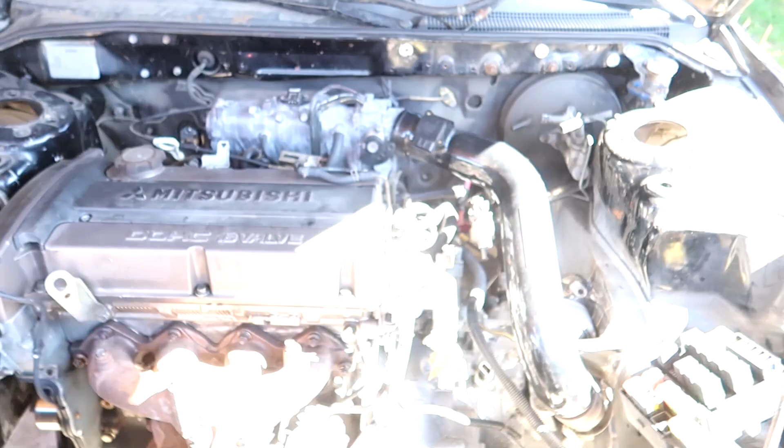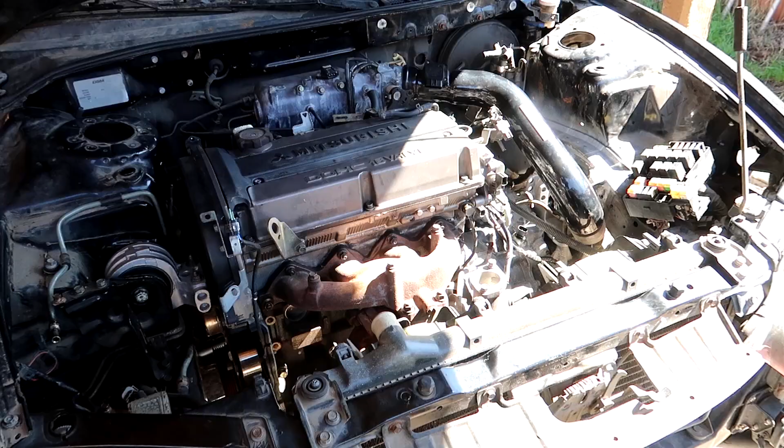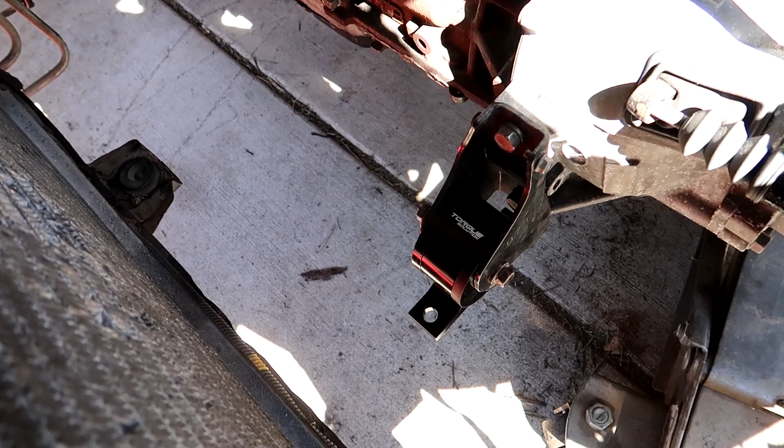Battery must be dead. Yeah, I'm just kidding, guys. I figured we'd start this episode with a little bit of a laugh. I just threw that exhaust manifold, turbo, and this radiator in there just to look at it, and this engine intake is actually out of an ex-girlfriend's Scion TC. So, just thought we'd have a little laugh before we start getting really frustrated with what we got to do next.

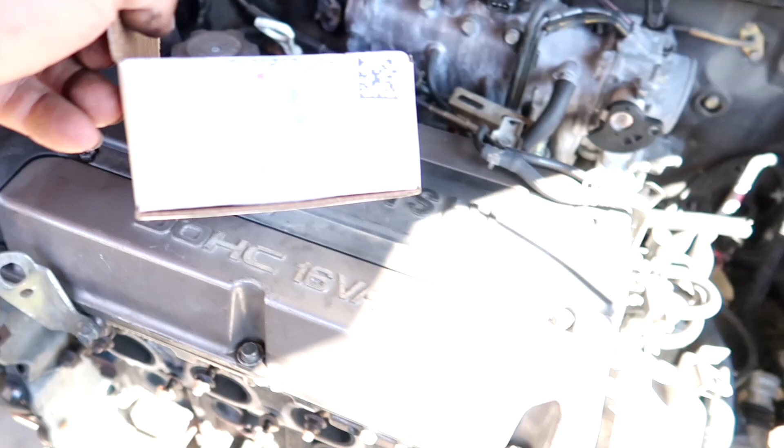So what we're actually going to be working on is this front motor mount here. I went ahead and got a nice Torque Solution front mount. This one is for an Evo 8, Evo 9, and there's the part number there. But they are actually exactly the same as the 2G DSM for the 420A and the 4G63.

I don't know about the 1G, because I don't have any here to compare them to, but I do know for a fact that the 2G 420A and 4G63 are exactly the same as the Evo, so you can get either. I went with this Evo one because for some reason it's cheaper than the DSM - this one was about $95, whereas the DSM was like $110 for some reason. I don't know why, they're exactly the same.

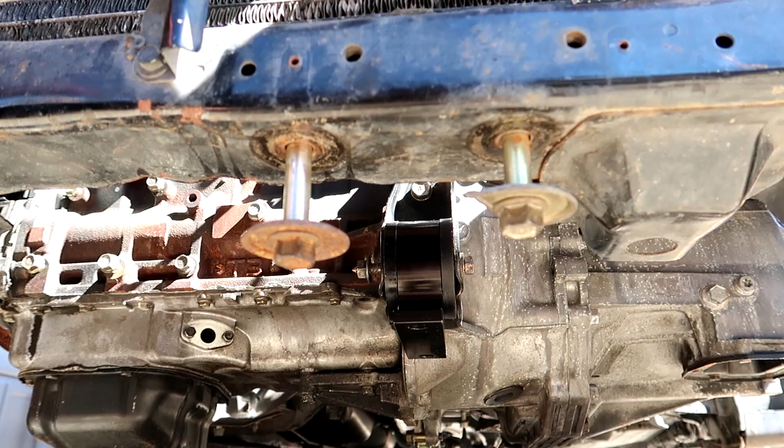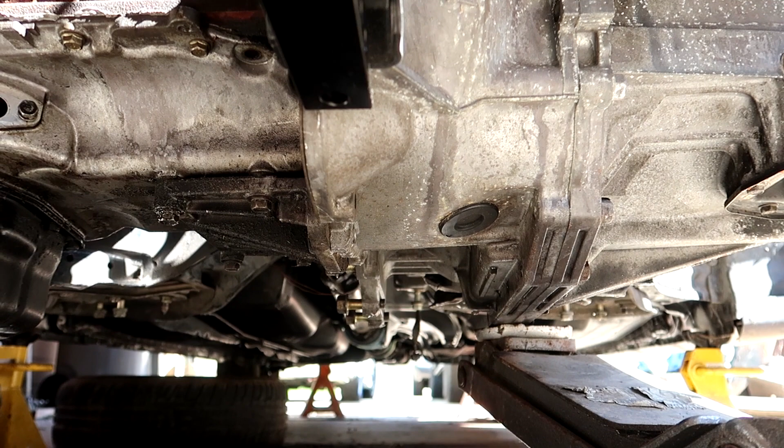Alright, so underneath here we've got these two bolts and the radiator support where the factory crossmember was bolted in, and then it's a straight shot right to this front motor mount, so that's easy. Then right through this space in the transmission you can see there's a bolt way back there right in the middle - let's see if I can zoom in on that. That bolt right there is where the factory crossmember was bolted in, so it's a straight shot all the way through this transmission.

But the part that I see as being difficult is right here, because this is going to come out here, but it's got to make a steep cut to the right and then go back. So I have to figure out what I'm going to do here.

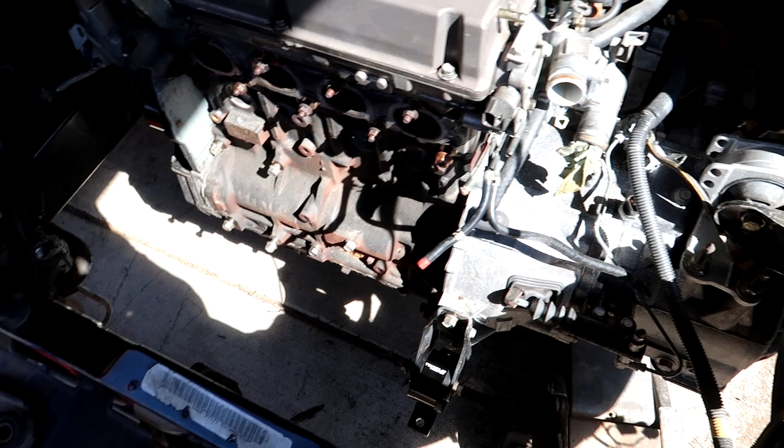Well, I've been rolling around out here taking measurements, looking at things, trying to figure things out. I pulled out the front factory crossmembers I've got here - this one is from the 420A, these are both 4G63. Looking at them, on this 420A one, from the front all the way right to behind the mount works pretty much perfect. The mount actually just needs to move forward here about a half inch, but the whole location and mount location all work out perfect.

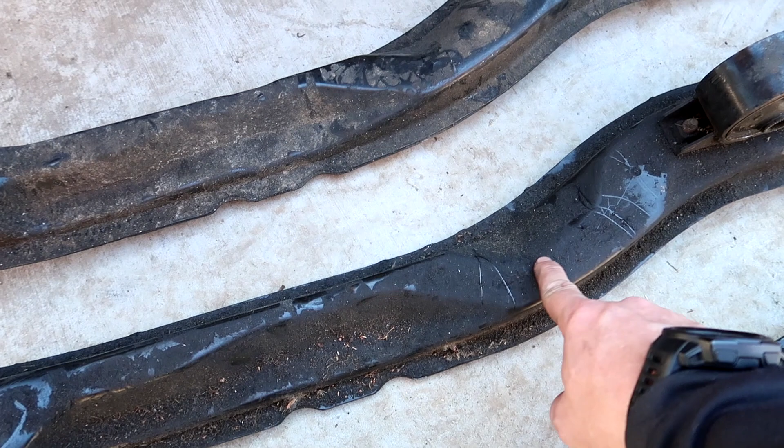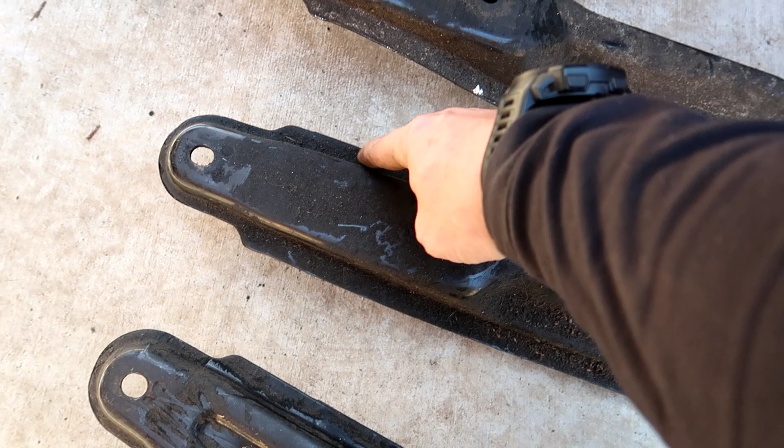But like I was saying, it needs to make that hard cut to the right here. On these 4G63 ones, from back here all the way to about here works out perfect - this all fits underneath the transmission. The only thing is it hits a little bit here and a little on the edge over here, but those could be notched out. The only issue is figuring out how to make this point and this point do almost a 90-degree angle to each other. I figure maybe I can chop that one up and use some of it to do that. I don't know, I'm still thinking.

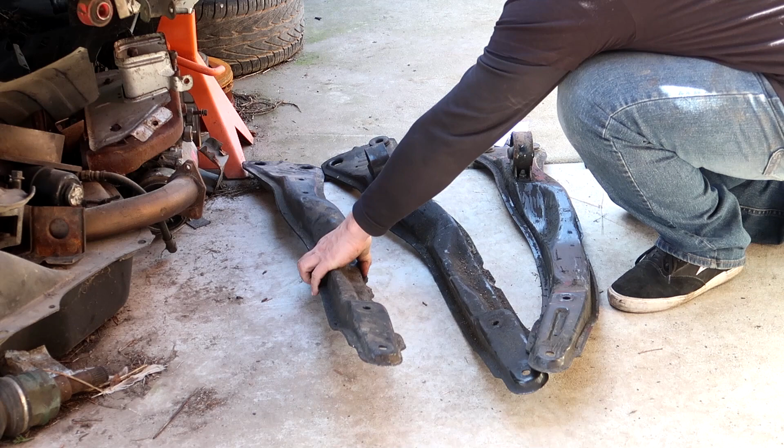Alright guys, I've been messing with these things for a while, and I just really don't think there's a way I'm going to be able to splice all three of these together to make one and make it look good. So I made the decision to run to the store. I got some 1 inch by 1 inch square tubing, some 2 inch sheets of metal, and I think we're just going to make our own. Hopefully it'll turn out good. So this is the plan I'm coming up with here.

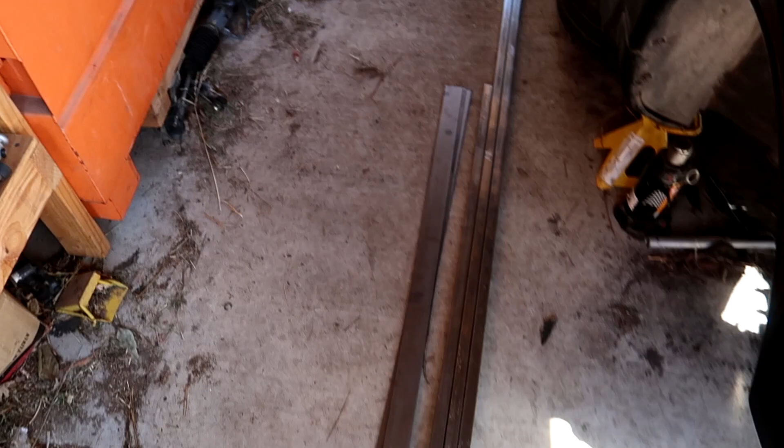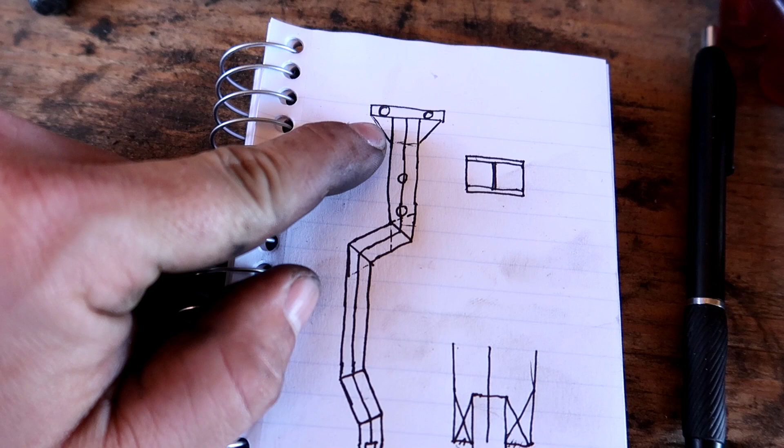Here's the front with those 2 bolt holes at the radiator support. So I figure I'll cut a piece there, drill the holes for those bolts, and then I'll have 2 pieces coming off together because that motor mount is actually about 2 inches wide. So I'll just put 2 pieces together, make it 2 inches wide, put the holes down the center, and that'll be for the motor mount.

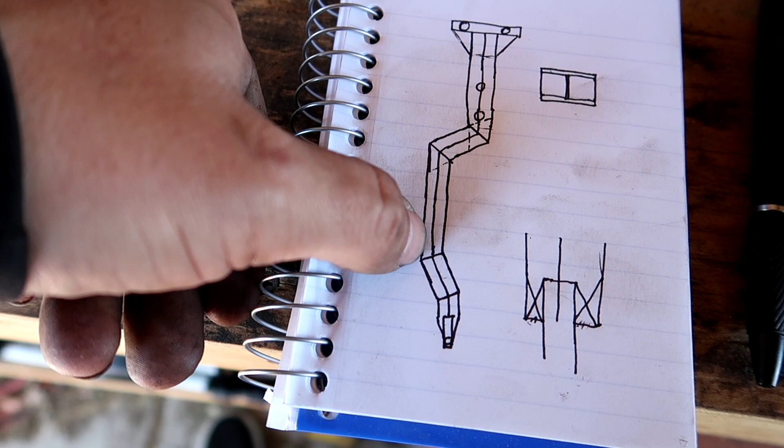And then we got to make that hard right over here and then come underneath the transmission. And then we got to kind of go back, after doing my measurements, make a little bit of a turn to get to this rear bolt. And since there's 1 bolt there, I got to figure out how to go from 2 to 1.

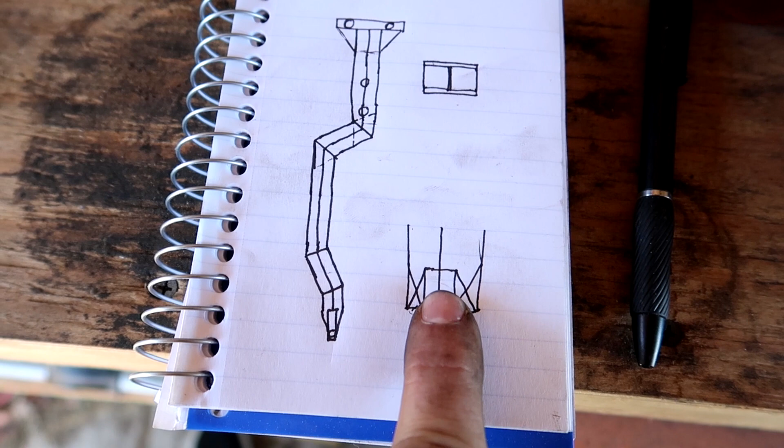So I think what I'm going to do is have the 2 pieces, have this one go right down the middle, and then I'll just cut angles into these 2, basically fold the ends into this one, and then weld that all up.

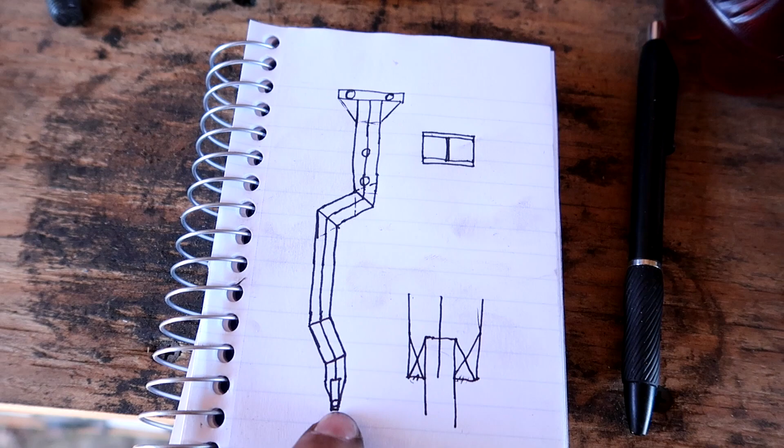And I got the 2 inch strips because essentially what I think I'm going to do is do the 1 inch tubes, 2 of them next to each other, and then I'll put the 2 inch strips on the top and bottom along this whole thing, just to make it more solid. I think that'll really strengthen it like that.

Ooh, birds are flying around crazy.

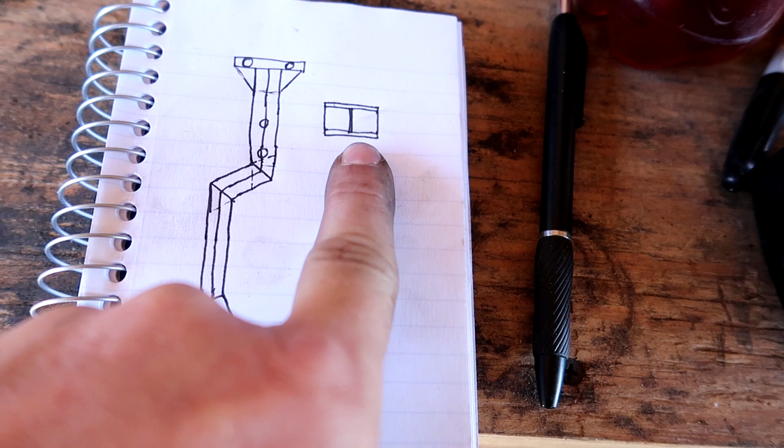So anyways, another thing I'm going to do to strengthen this up is I'll have the 2 1x1 tubes together, and at these joints what I'll do with the 2 inch by 1/8 inch sheet is I'll actually go past that joint and make a separate joint, just stagger the joints, and that should really make it more structurally solid. So that's the plan I'm coming up with. If I can do it and it works, that's another thing.

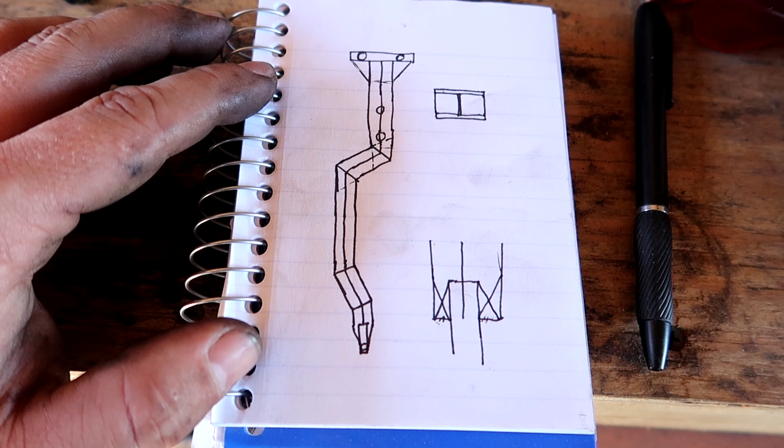Alright, I got the first piece to our puzzle cut here. Wasn't too bad, actually pretty easy. This is the one that's going to go here.

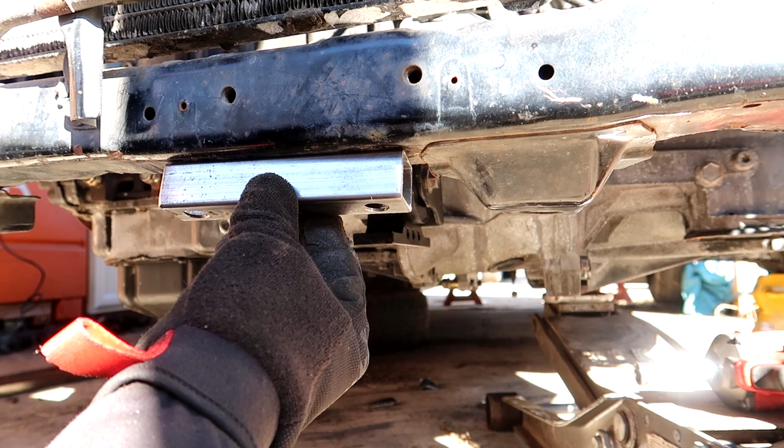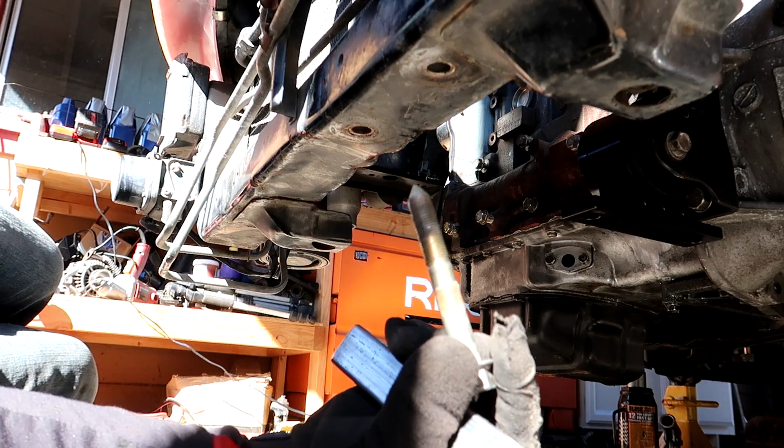Maybe I should check to see if it actually bolts up, if I put those holes in the right spot. Alright, I'm going to reuse these bolts, but they're obviously too long. I'll have to get shorter bolts later, but just wanted to check this. They fit right in the holes, that's good.

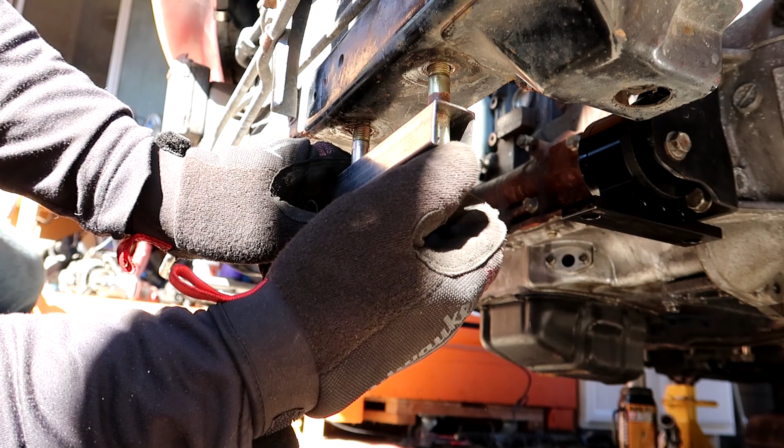Alright, yeah, so that piece will go right like that. Alright, I'm already running into some issues. My little plan I drew up is not quite working out.

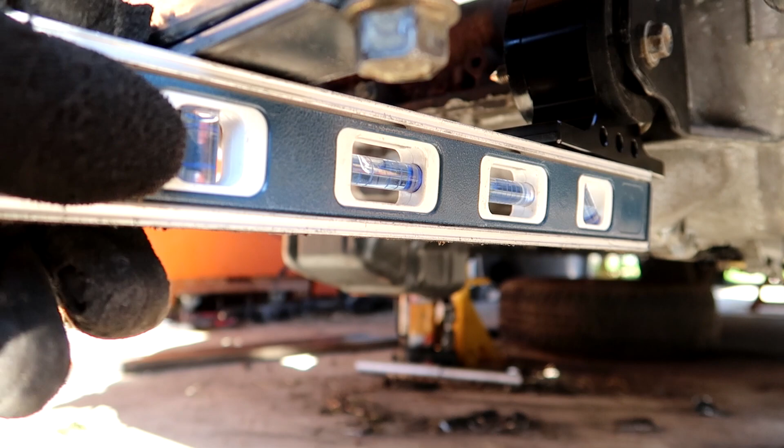So in order to get the bottom of this to be straight flush with the bottom of the mount here, I got the mount nice and level, and so as you can see, to get straight across flush with the bottom of the mount to here, I had to add a piece of 3/16 steel, and then these are also 3/16 steel, but I already planned on using those, so it's an extra 3/16 to get down just for the bottom of this to be at the same level as the bottom of the mount.

But then remember, I got another 1 inch piece of square tube going here with another 1/8 inch piece of flat stock on it, so that's going to bring it way down here. It's about like 2 3/4 inches from the radiator support here, and I don't like that.

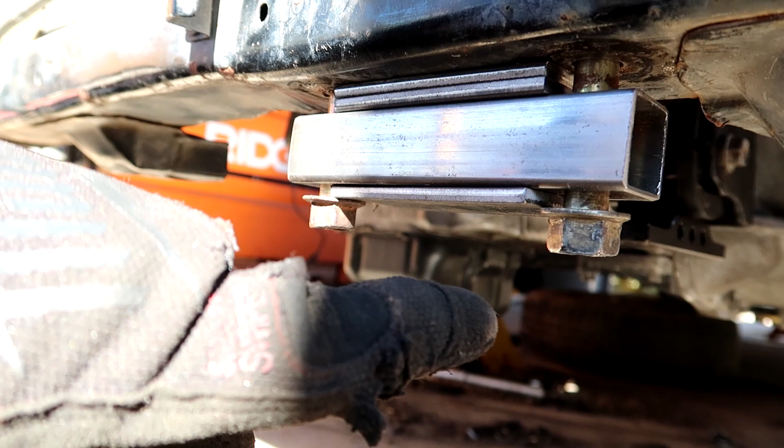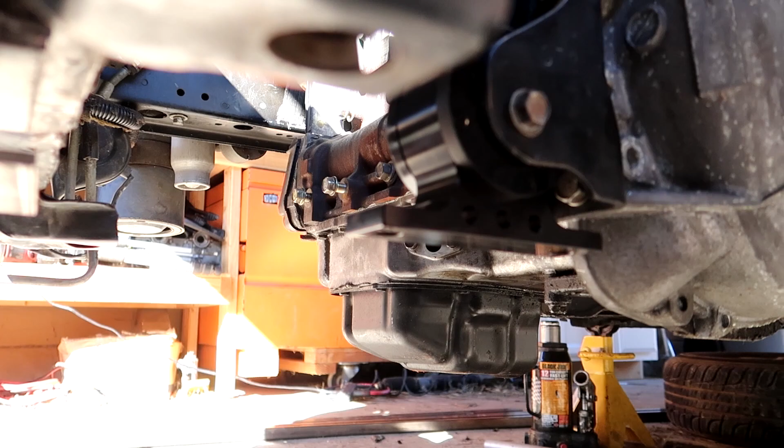So I think what I'm going to do is pull this 3/16 out, bring that up, and then I'll just have the back of this come down at a bit of an angle and then go straight out to the mount there. It's a little more difficult than I was expecting. I thought this would just be straight across, but you know, gotta deal with what you gotta deal with.

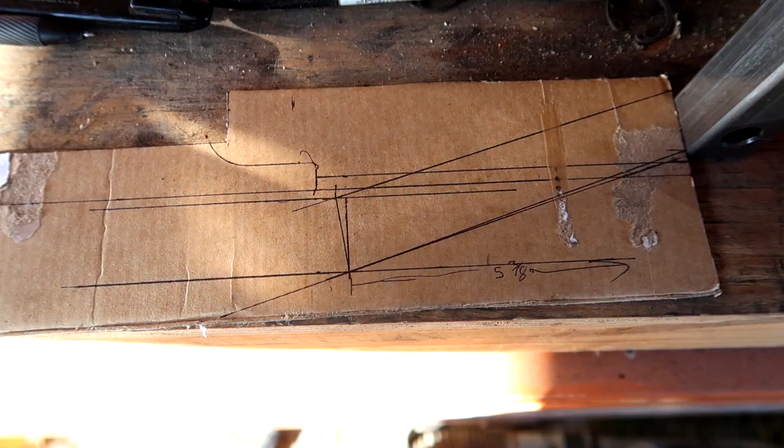Alright, I went ahead and made myself a little cardboard template here. I know it kind of looks like a mess, but I'll explain it to you. So here's the base of the motor mount, and then I went the 1/8 inch space for the flat stock we're going to put on top of the tubing, and then we got our 1 inch tubing and just ran that straight across.

And I butted this up to essentially this piece that we're sticking on the bottom of the radiator support, so that's gonna go there like that, and then just did a straight line 1 inch down, found this angle, and since I butted this up against there, found that angle.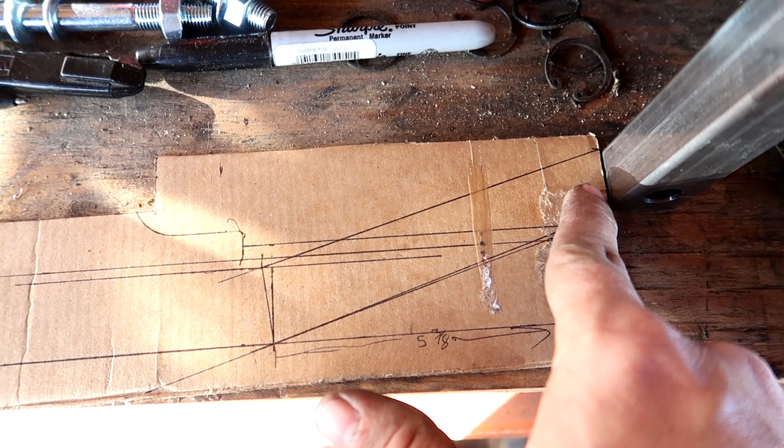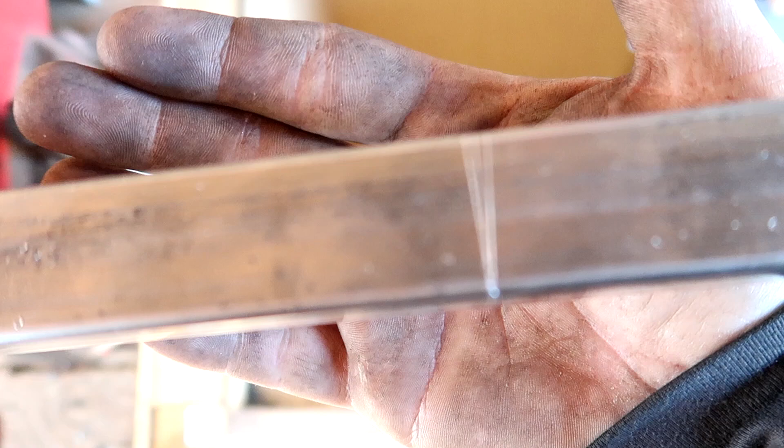On the tube here, it's probably gonna be hard to see, but I ended up with that angle. Then I have to cut this miter, and once I cut that, I should be able to bend this pipe up, and that'll give us the angle we need. I ran a long measurement, and we'll trim that down once we get it in there, but hopefully that's what we need.

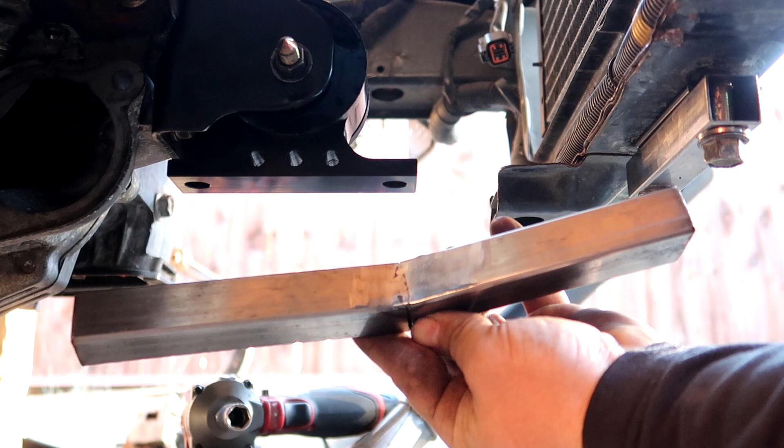Alright, got the piece made. Pretty easy. I got it welded up right here in the middle because I couldn't keep the bend together. It kept wanting to come back apart, so I just went ahead and put a quick weld right across there. But it fits pretty nice.

Remember, I'm going to put a piece of flat stock on top and bottom of it, like that. Let's see, right there, fits pretty dang good. Let's see if I can show you. Look at that. That's gonna be nice. I like that better than what we were looking at before.

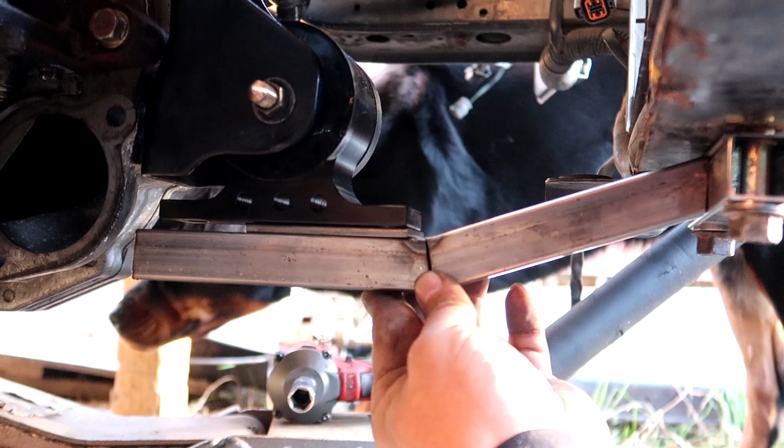So now I just gotta make a duplicate of this one. And then there were two. Got them both made up exactly the same.

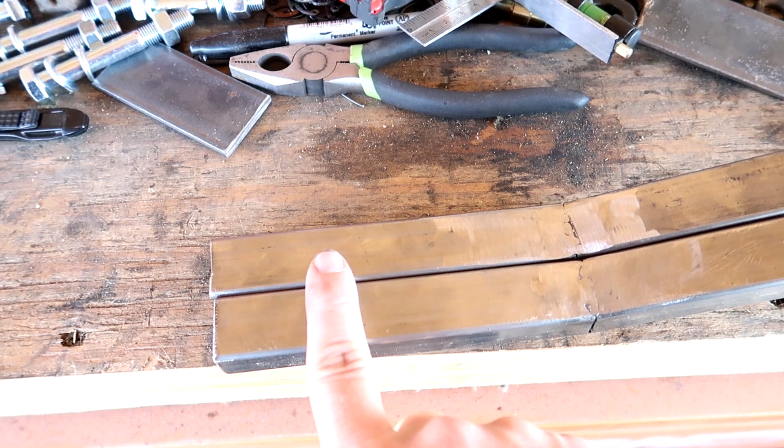Next we're going to figure out where this mount is going to sit, and it's going to go right here. I got to figure out where the bolt holes are, and those bolt holes are going to land right on this seam. So I got to get a little tricky with figuring out how to cut out these circles right across this seam, but we'll get it.

Alright, that wasn't easy, but we got her done. Got the bolts all the way through, bolted on, nice and sturdy, perfectly centered in there. It was not easy.

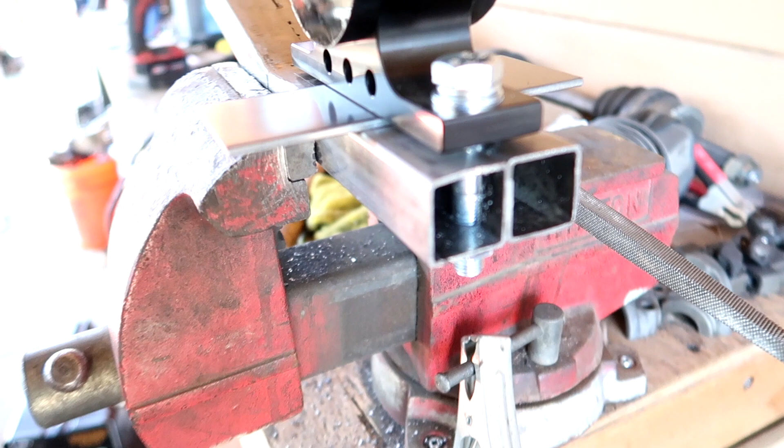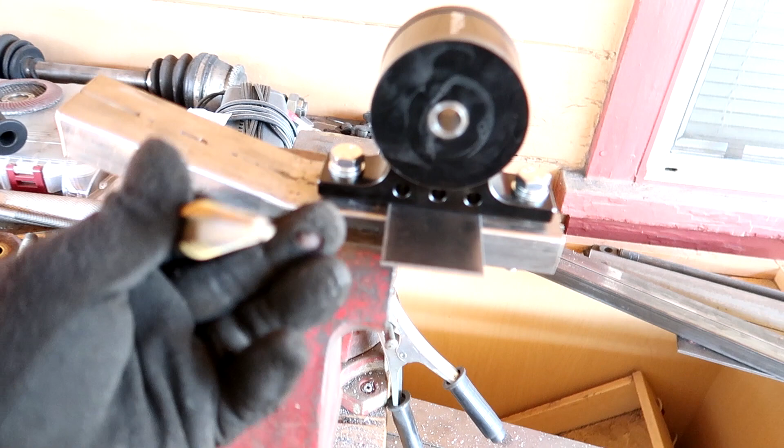Getting that cut out in the middle there, I wound up using this step drill bit just to get the top and bottom drilled out, and then I had to go back with this round rasp file to clear out the middle, but it's done.

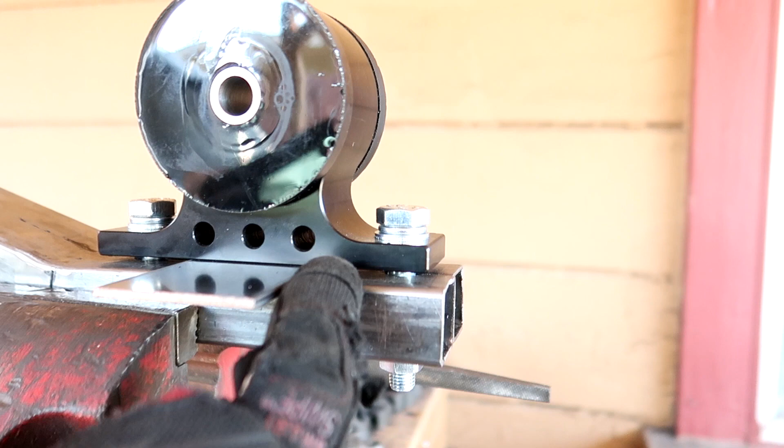I just got this plate in here temporarily to keep the mount held up at that space, because we're going to put this plate on the top of there. So let's go see how this fits in the car.

Alright, there it is, all bolted up, looking pretty dang good. I'm starting to get a little impressed with myself. So let me see if I can show you this.

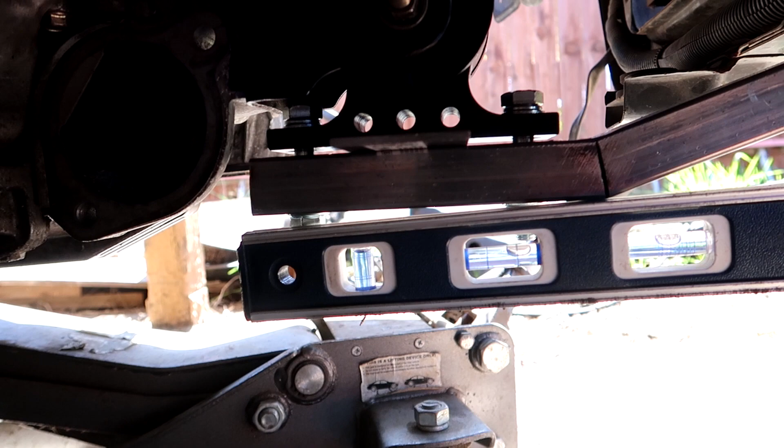You can see pretty dang perfectly level still, and then our joint here lines up perfectly with the bottom of this one, if this stupid camera will focus. That joint there's a little tiny gap, but this has some wiggle in it, so I could just loosen this up, push it over, get it nice and tight, and then we'll weld that up.

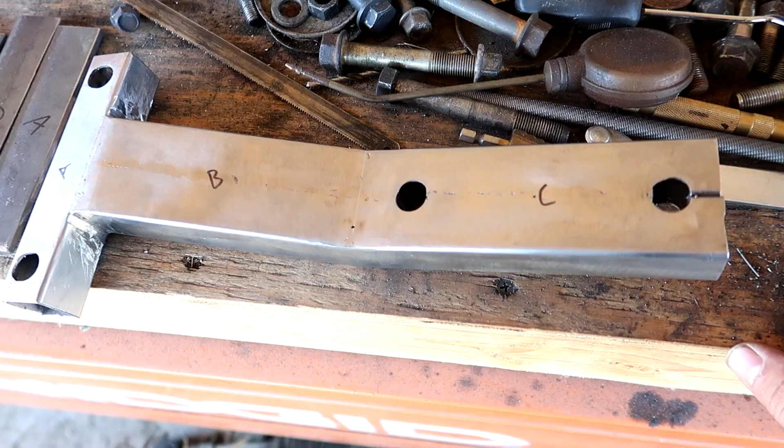Alright, here's how we're looking all welded up. I didn't weld right here because I gotta figure out what I'm gonna do about the angle here to get this thing to jog to the right. But I got it all welded up nice, looking good, both sides.

These letters I put on here are because I'm starting to cut these plates, and these plates are gonna go on here like so. But I'm gonna wait until the very end, after all the tubing is put together, and then I'll start putting these plates on here.

I put this thing on the ground on this corner, and then I stood on each end here, and it held up just fine. And I'm a fat boy, so I'm pretty confident in that structural stability. So let's keep on going.

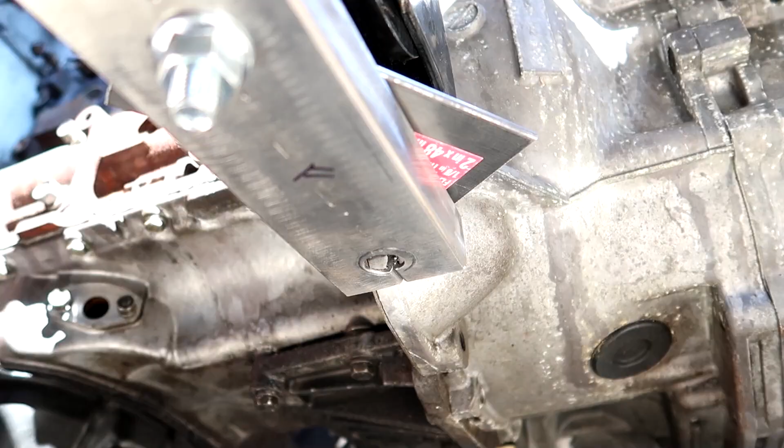Man, I've been down here for a while trying to figure out what angle I need to get this to go past the starter bump out right here to go underneath the transmission.

Bro, what are you doing?

And I'm having a hard time trying to figure this angle out to get that right. So I'm going to go ahead and we're going to start back there at the bolt that we're going to mount to, if it'll focus. Yeah, we're going to start at that bolt and work back this way, going underneath the transmission. And then once we get up here at the end, I think it'll be easier to figure out that angle. You know, just have to try to meet these two pieces up. So I think I'm going to do that.

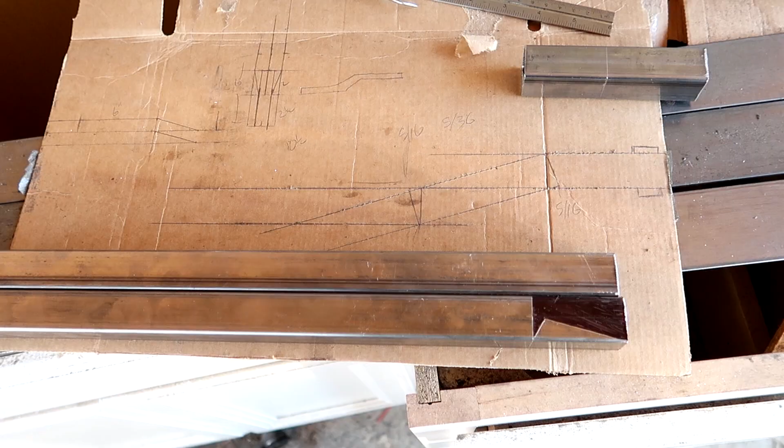I'm going to start back there, work back this way, and then we'll figure out this little situation here after that. Alright, here's my whole thought process starting at that back bolt.

I probably should have started this video by letting you guys know I'm not a metal fabricator. I've never done any metal fabricating. This is the first thing out of metal I've tried to build, so if it doesn't come out right, my bad. So here's how I'm trying to figure this out.

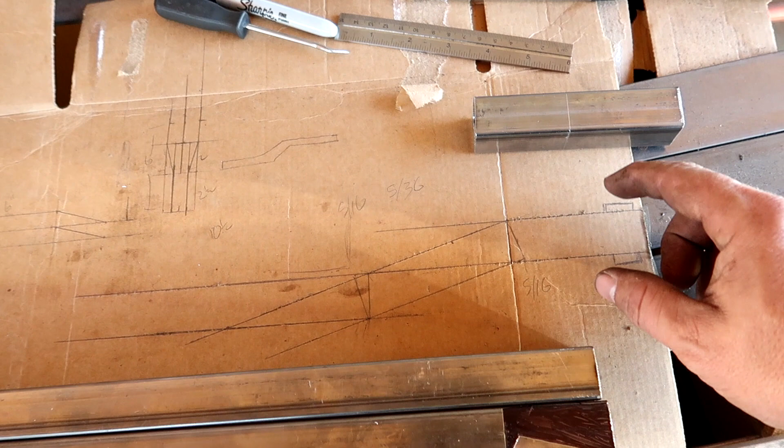That back bolt is here. Now the transmission is actually lower than where this bolt is, it drops an inch. So I'm going to have to come out from there, drop an inch, and then go under the transmission. So this is how I'm trying to figure out the angles I need to make that drop.

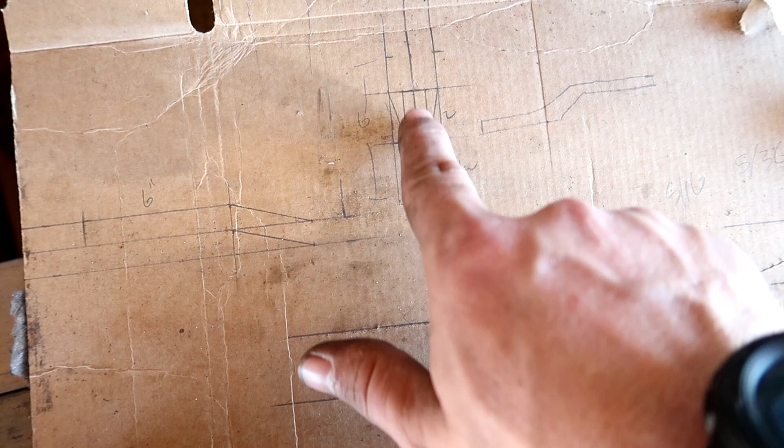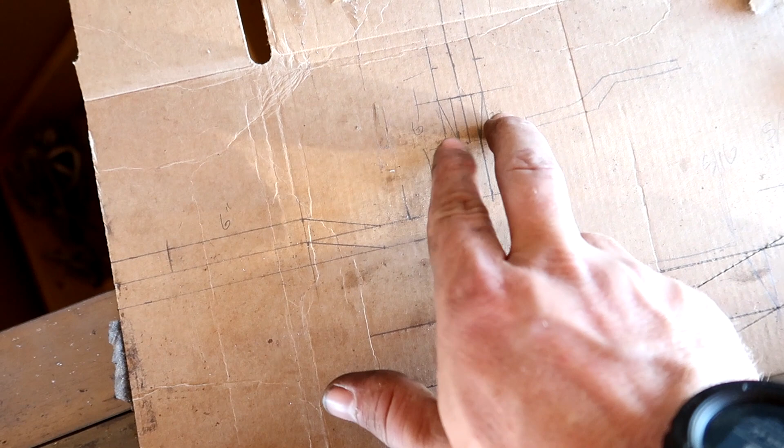And where the bolt is, it's just one single bolt, so since I'm doing the two pipes together, I'll have to do one in the middle where that bolt is. So my plan is to use one square tube, going back about 4.5 inches, because I want 2 inches to come into each of the two pipes. Then I'm going to cut angles on these two pipes to bring them in to meet the one in the middle.

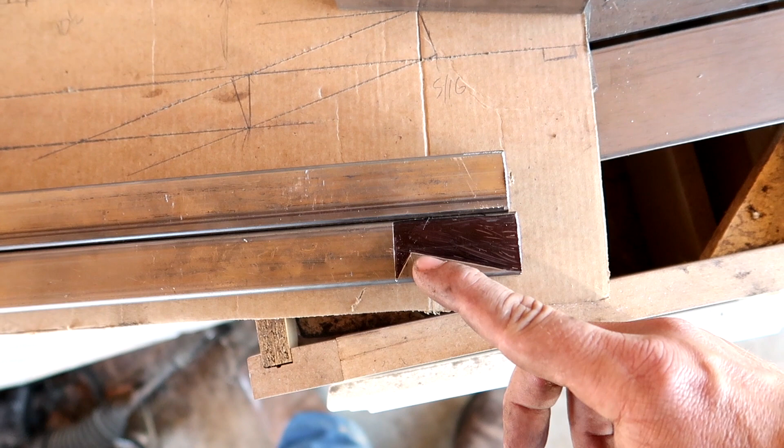I colored this in Sharpie so you can see it. So how I'm figuring this out: I'm going 2 inches into these two pipes, then I need to cut this angle and bend it in to meet that pipe, and I can weld it all up. I also need to make a relief cut so it has room to fold back in, hopefully meet up with this, and then weld it all together for a nice transition from 2 into 1, with the bolt hole there.

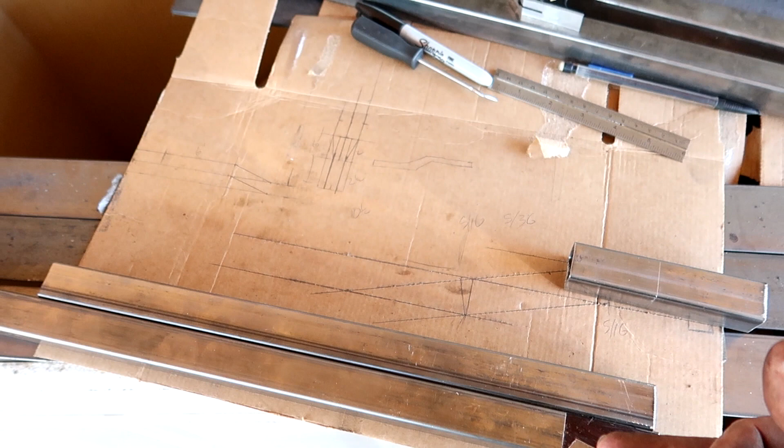At least that's my thought process. If it works, I don't know. We're about to see.

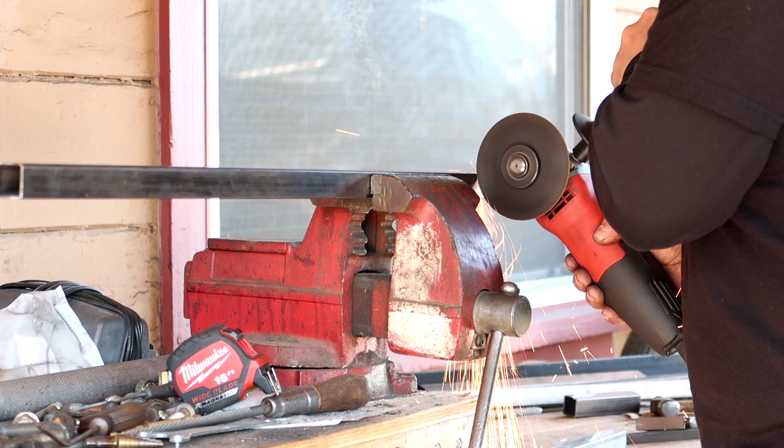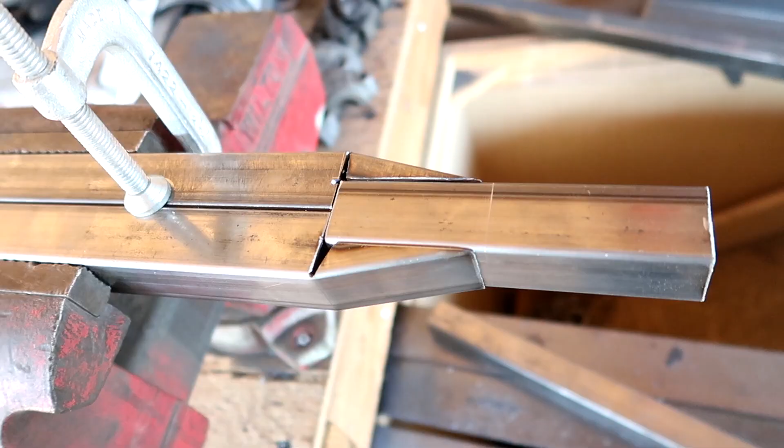Alright, here's what I got. Man, I'm super happy everything seems to be working out the way I want it to. My relief cuts here were a little bigger than they needed to be, I just took a guesstimate on that, but it's nice and tight.

This isn't welded in, it's just sitting in there, shows you how tight that is. But man, I'm super impressed with myself. I know self-praise stinks, but I've never done anything building out of metal.

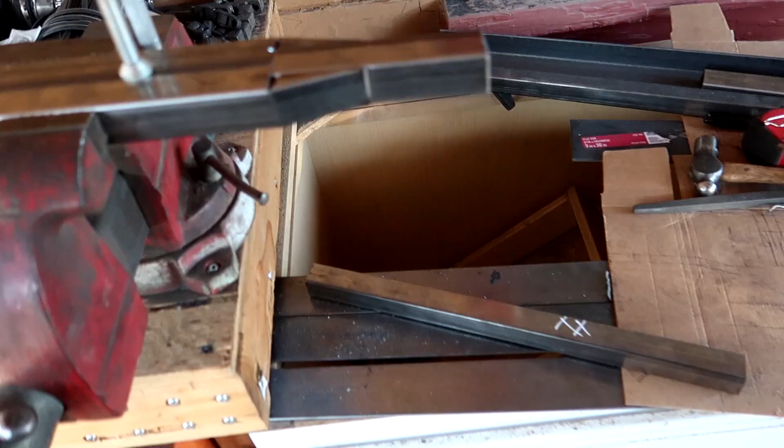I'm a carpenter by profession, I don't think I ever mentioned that. I do cabinetry, which is why you see cabinets sitting around everywhere in the videos. It's basically the same with finding miters and joints and everything, but I've just never done it with metal. So I'm very happy it's working out.

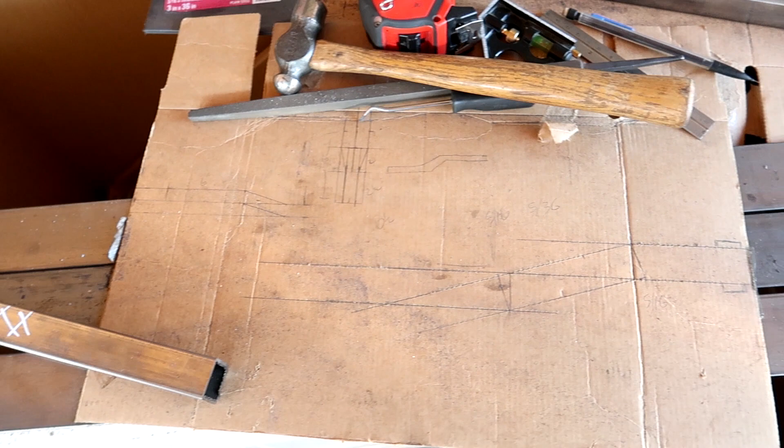Now next, I got to figure out this 1 inch drop, these angles that I need. So, windy out here, hopefully that works out, because if it doesn't, then all this would have been for nothing. Right around here I got to make an angle, come down an inch, and then another angle to go back. That's going to be fun.

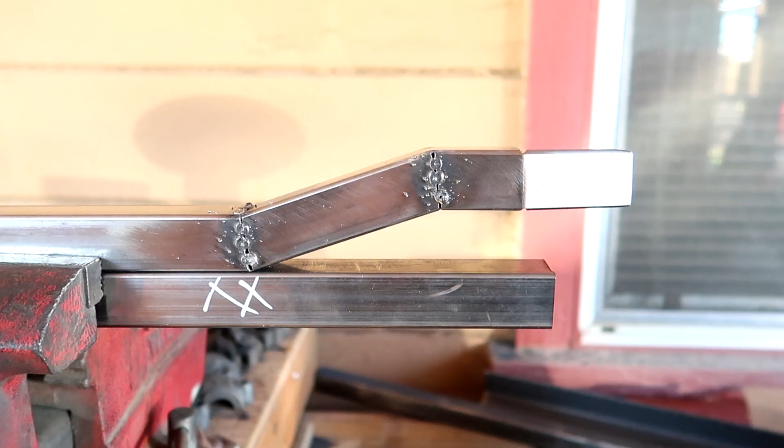Alright, I got my angles cut and tack welded together. I did it just like the other piece, made my angle cuts and folded it together, so it's still one continuous piece. That should keep it nice and solid.

And then check this out, we got our perfect 1 inch drop like I wanted. So everything's working out just fine.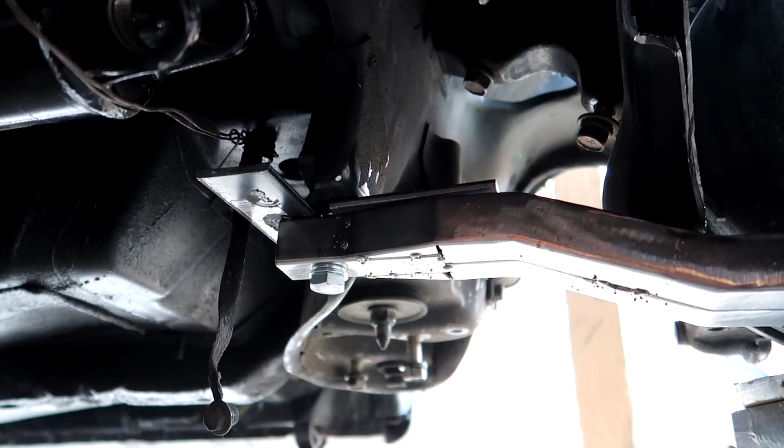Alright, status report. I got it bolted in back here, I got my spacers in there holding it down to where it's going to end up being once I put the flat stock on there. I got it coming down, goes underneath the transmission here.

But I noticed it's not level. All my stuff is straight, but where it bolts in is kind of sitting at an angle, so it's making this kind of drop. So what I had to do is, right at the lowest point of the transmission, I put a little relief cut in there and bent it up, and that got my bar back to level.

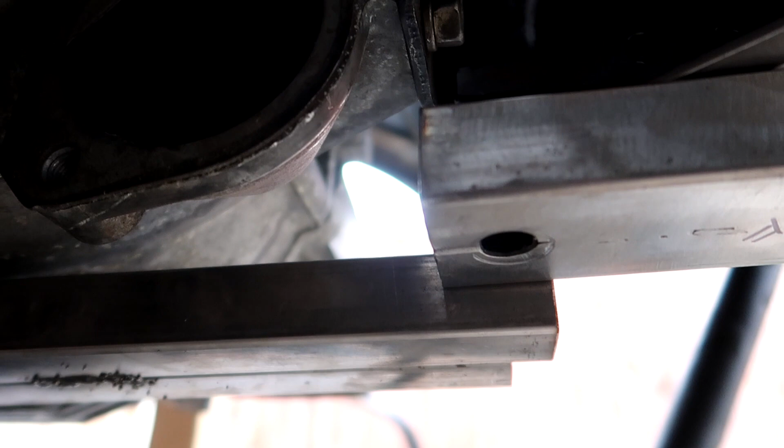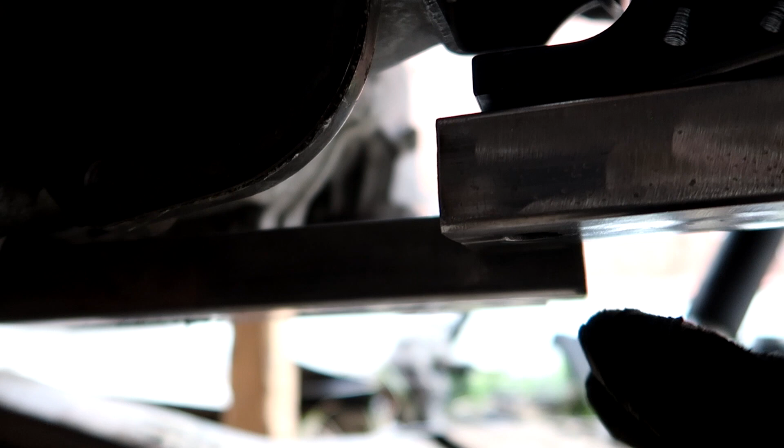So now we're at this situation. It's not at the same level as this piece. My cut here is going to have to be at a hard angle going this way to get around the starter, but it's also going to have to drop just about a half inch. So that's going to be a difficult one to come up with.

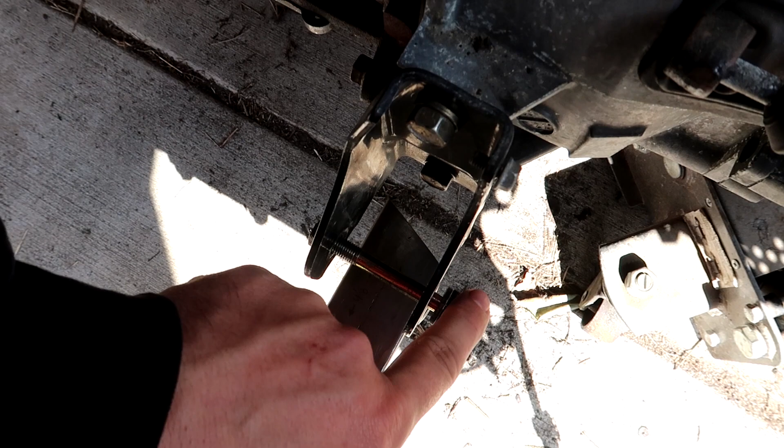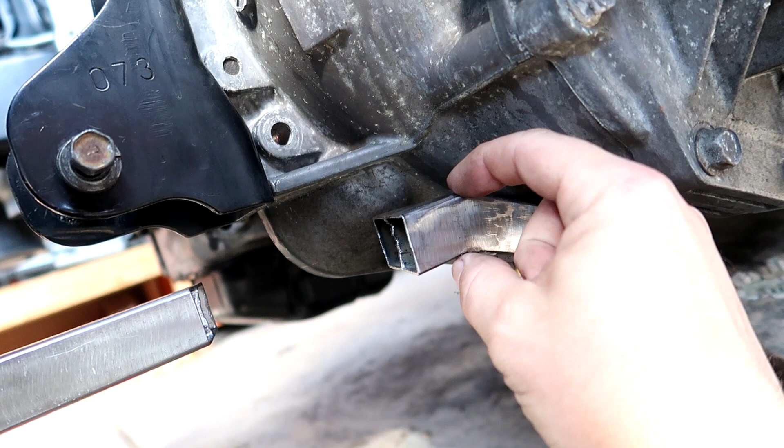I've been messing with this thing for several hours now, trying to figure out these angles. I got this one figured out how I want it, but remember this piece is a half inch lower, so I have to do this angle plus another angle to get it to drop, and I just can't figure that angle out. So I decided to go another route. I decided to just put another notch here to angle this up, bring it up that half inch. Then I put another notch here to flatten it out, and now we're at the same level as here.

So now I just need to cut these two angles, which I already figured out. I'm gonna do a 45-degree angle, so these are 22.5-degree cuts. I just got to put these two pieces here, and then that will be our whole cross member there. I just have to put the plates on the top and bottom, paint it, and then we're done.

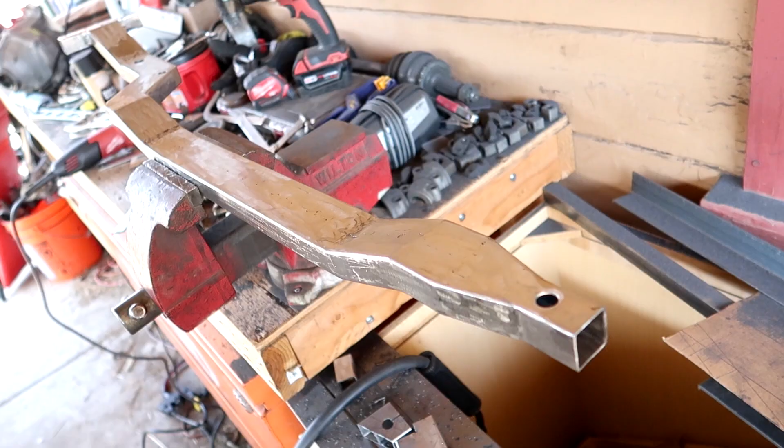All right, there she is, one solid piece finally. Now I just got to put the plates on it, paint it, and she'll finally be done. But I'll give you a shot of this mounted under the car.

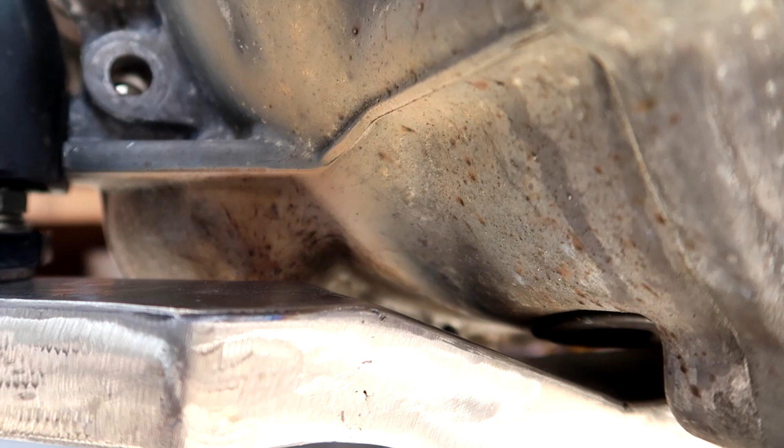All right, bolted up in the back, come through here, underneath the transmission, come back up, got the mount bolted up, and then bolted up to the radiator support. So everything's clear, got a nice about half inch gap to the transmission all the way around. Cool. So I'm gonna hurry up and finish this up.

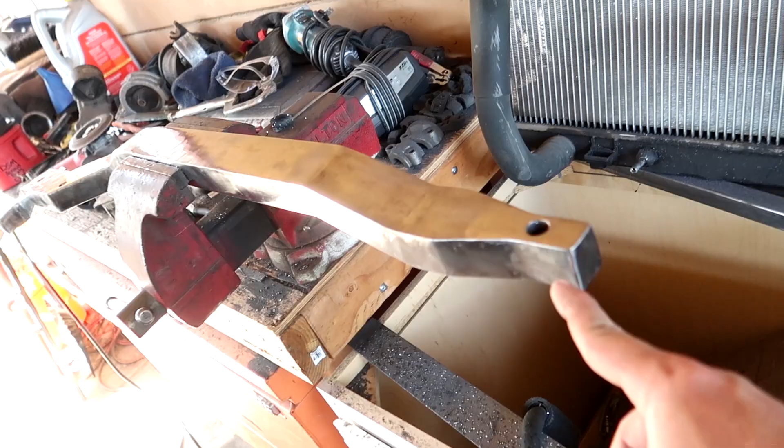Alright, got it all welded up and grinded and everything, looking good. And I got the 1x tube in the square tube in the middle with the plates top and bottom, capped off all the ends, looking all good.

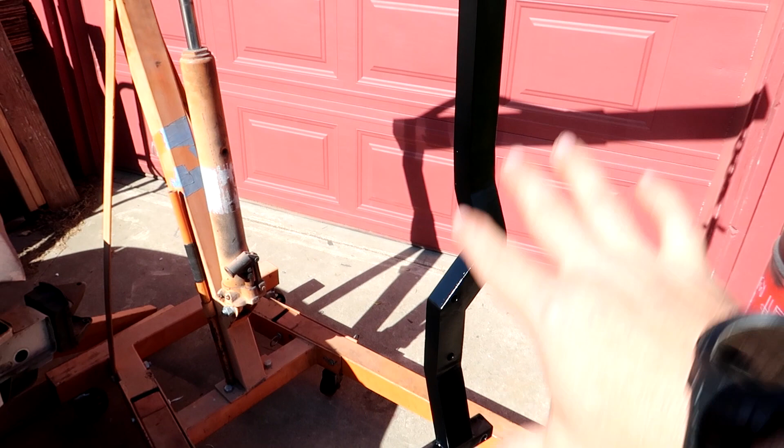Now it's time for paint. And there she is, all painted up, looking fresh, looking real nice. Although now that it's painted, I'm kind of wondering if I should have put the undercoating on it that I put under the car, kind of make it match.

I don't know, let me know in the comments what you guys think. Should I leave it painted like this or put the undercoating on it? I can still always do that.

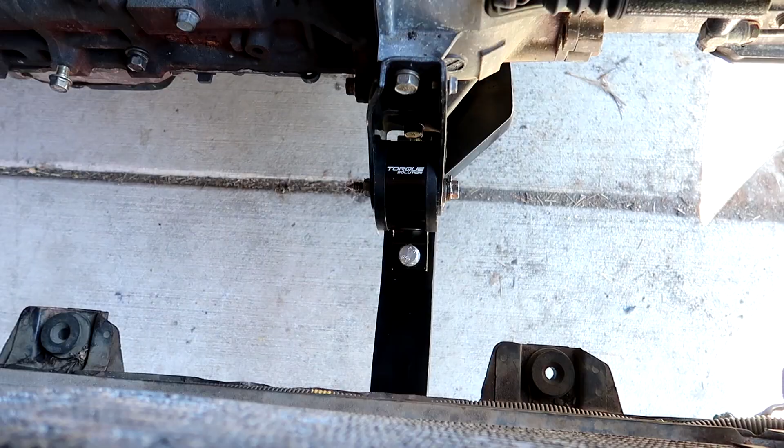But alright, let's get it on the car, make sure it still fits. All right, there she is, all bolted up, still fits, looking good. All the way back, bolted in back there. Very nice. And a view from the top down with the Torque Solution mount.

Woo-wee! Alright guys, so that's finally done. That took way longer than I had expected, so I'm sorry this video is taking so long to come out.

I had a lot of people send me messages asking if I was even still working on the car, which is pretty bad. So I am still working on it. Some other stuff came up. Like I've got this G35 here I'm working on. A friend of mine brought that over. She just bought it, had a blown head gasket, so I'm working on that. Other things with it too, you know, I want to make sure that's a nice, reliable running car for her. She's a single mother and does everything on her own, so I try to help her out whenever I can.

And then I'm also trying to get my contractor's license and start a finished carpentry business, so I'm working on that. So it's just a lot of stuff going on at one time, but I am still working on the car. Don't worry. So I apologize that this video was actually very long and took very long to come out.